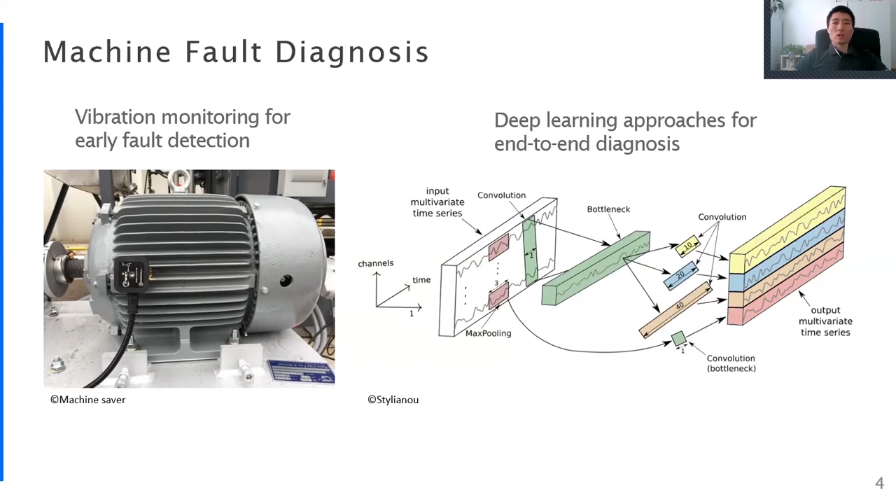However, when we are going to deploy the deep learning models for railway freight wagons, we got many challenges in practice. Here, we will show you two examples. Normally, we install the sensors on the bogie for vibration monitoring. Bogie is the running gear and the most important part of the wagon. In practice, it is extremely difficult to collect faulty data due to the cost, operational issues, and the safety issues. We can only do the experiments on one or several wagons.

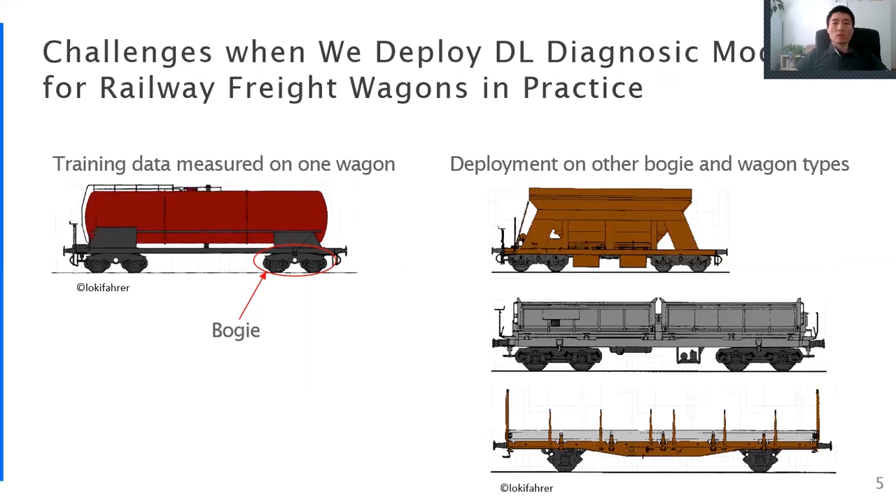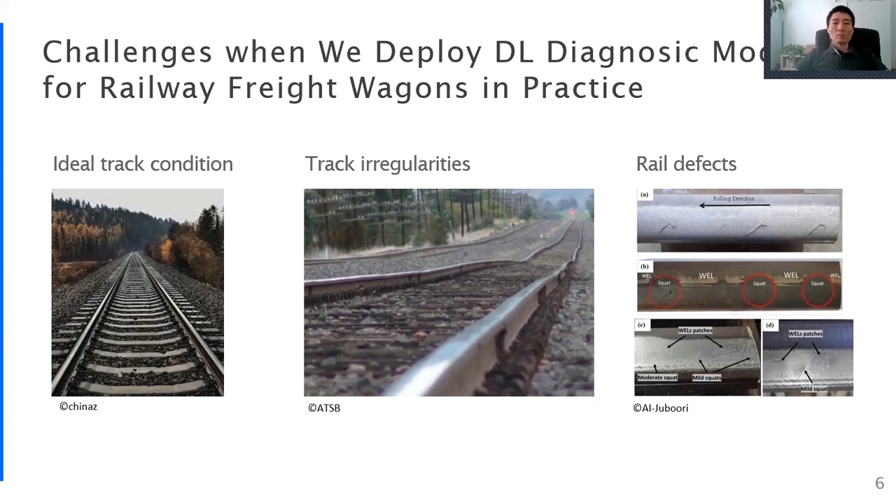Once the models are trained on the training data, we have to deploy the models on many different wagons and bogies, which could have different dynamic characteristics. That means it results in differences between training and testing data distributions. Furthermore, the wagon is running on the track. The track condition can also be very different. The track can be in a good condition. There could also be severe track irregularities or rail defects, which can be regarded as signal interferences, causing abnormal vibration excitation on the wagons.

In summary, the conditional variations in practice can result in the difference between training and test data distributions. We expect the diagnostic model can be robust to have a similar performance when tested within and outside the training data distribution. That's the reason why we conduct this empirical study. We want to answer the question: is the deep learning diagnostic model robust to conditional variations? The idea of the empirical study is to test several state-of-the-art approaches for machine fault diagnosis on conditional variations which can happen in railway normal operations.

As baseline models, we select the residual convolutional neural network as a backbone. The ResNet consists of 3 residual blocks for feature extraction. After global average pooling, there's a fully connected layer for classification. In the first model, the input data is the raw vibration data. We also consider if signal processing techniques can affect the robustness of the models. Therefore, we use a short-time Fourier transform to get the frequency spectrum as an input for ResNet. We also use a wavelet packet transform to get different scales of wavelet coefficients as the input for ResNet.

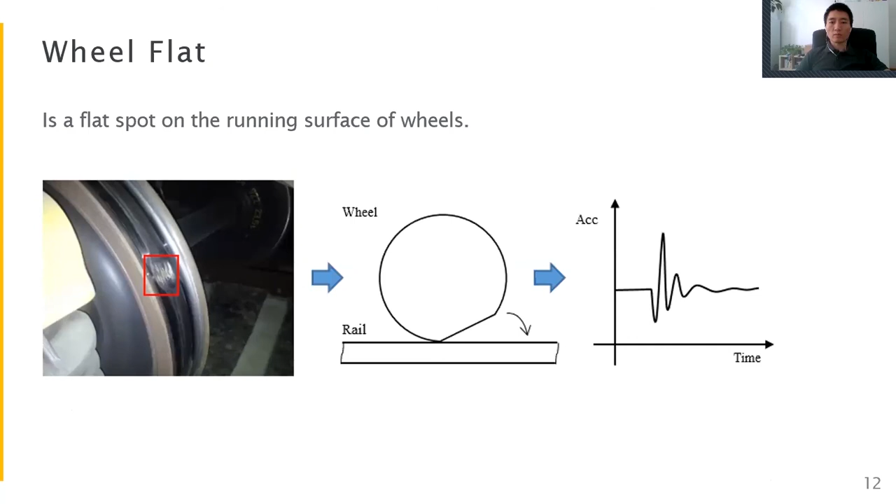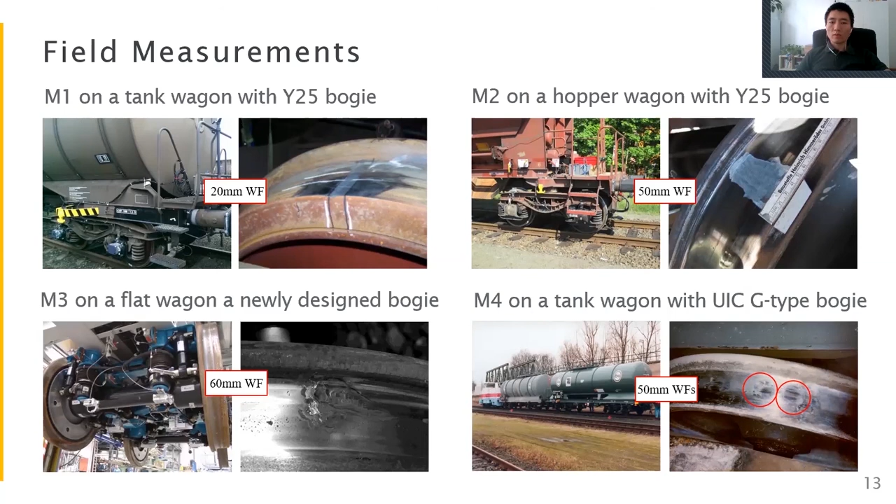We spent a lot of effort on data collection. In this study, we mainly use the following 4 datasets. M1 is measured on a tank wagon with a standard Y25 bogie. We manually created a synthetic wheel flat with a 20 mm length. In the M2 dataset, we also created a synthetic wheel flat with a length of 50 mm on a hopper wagon with a standard bogie. In M3, the measurement was conducted on a newly designed bogie with a natural wheel flat with a length of 60 mm. In the M4 dataset, the measurement was done on a very old tank wagon with a UIC bogie. There were 2 adjacent wheel flats with a length of 50 mm.

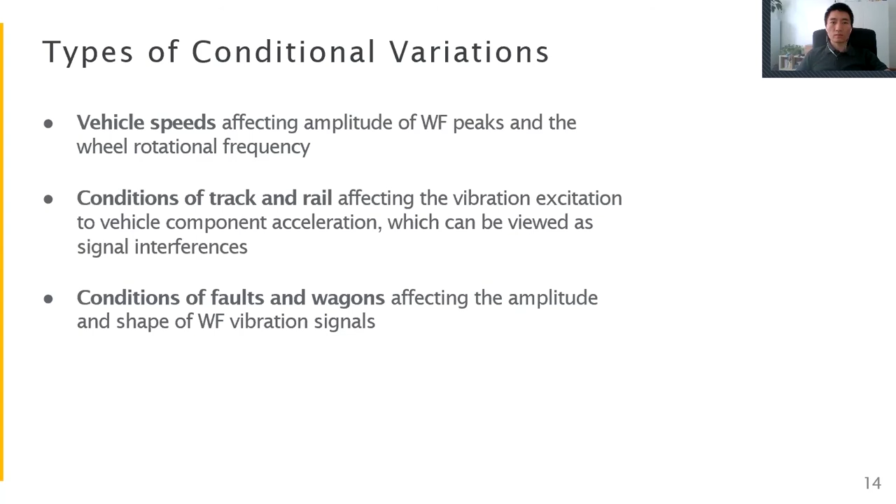We defined 3 types of conditional variations. The variation of vehicle speeds affects the amplitude of the wheel flat peaks and the rotational frequency. The variation of track and rail conditions can be regarded as signal interferences, as previously presented. The variation of fault and wagon conditions affects the amplitude and the shape of the wheel flat signals. For each conditional variation, we conduct an experiment.

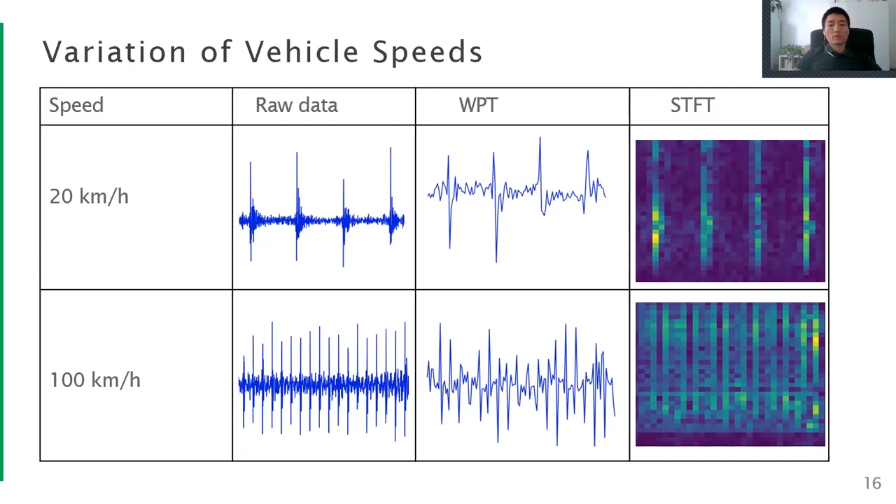In the first experiment, we show 2 examples of wheel flat signals at a low and high speed respectively. No matter whether it is raw data in the time domain, wavelet coefficients or the frequency spectrum, the wheel flat characteristics are always visible. We train all models on the data at higher speed ranges between 55 and 95 km per hour. When we test the models on data in the same speed range, all the models achieved satisfactory detection accuracy.

However, the detection accuracy decreases with the decrease of speeds. That means when the difference between test data distributions and training data distributions increases, the model performance decreases significantly. In comparison to 3 ResNet-based models, the GBDT with handcrafted features has achieved much better robustness.

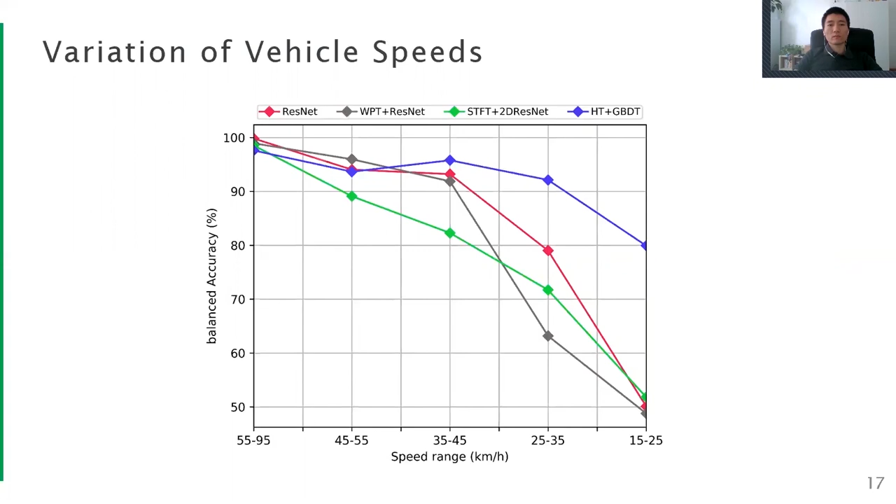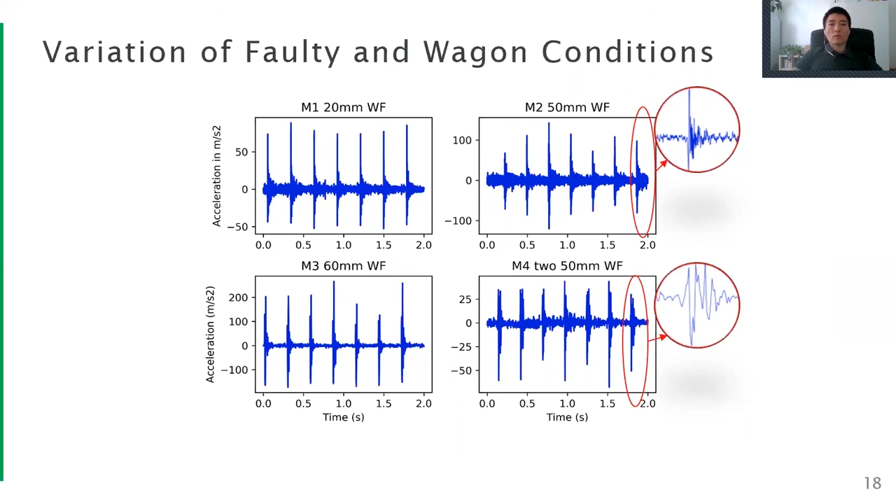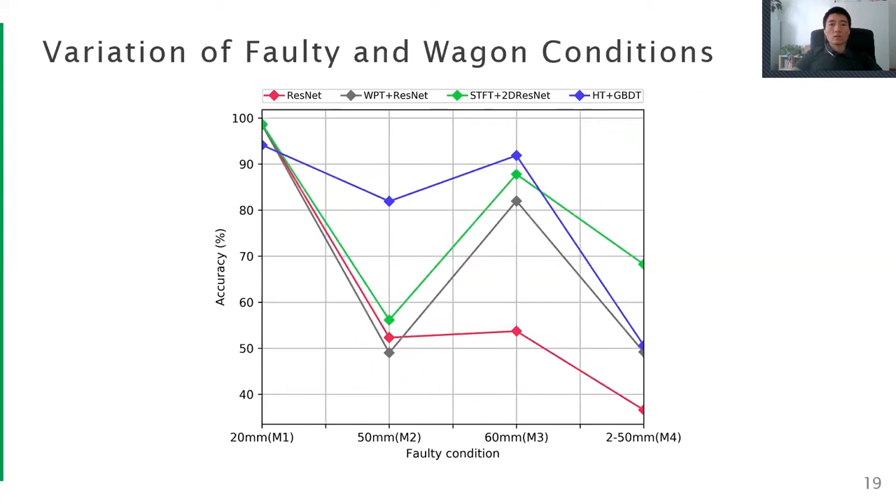However, when we train the models on the M1 dataset and test on other datasets, none of the models can achieve satisfactory performance on all datasets. GBDT with handcrafted features works on M2 and M3, but fails on M4. The 3 ResNet-based models failed on both M2 and M4.

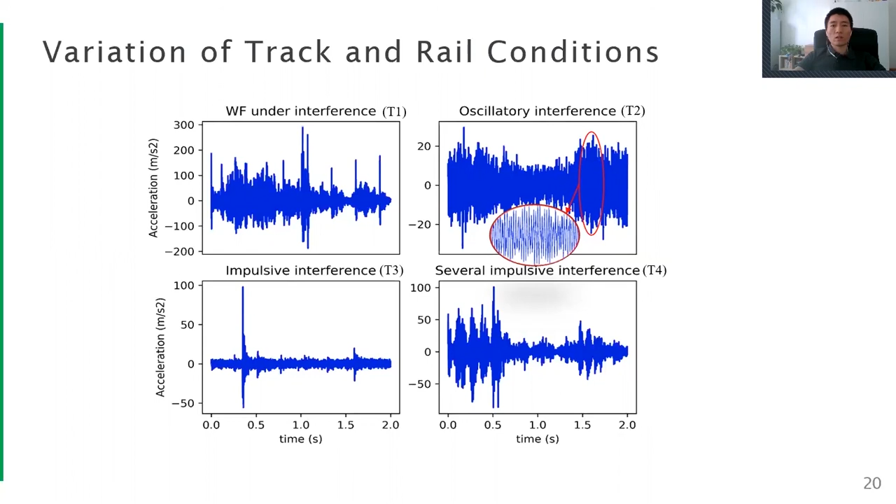In the third experiment, we plot the typical signal interferences caused by variation of track and rail conditions. In the top left diagram, T1 is the wheel flat signal under interferences, which can be caused by severe track irregularity. T2 is normal data with interferences caused by track irregularity. T3 is impulsive interferences, which can be caused by rail defects. T4 is several impulsive interferences, which look similar to a wheel flat signal.

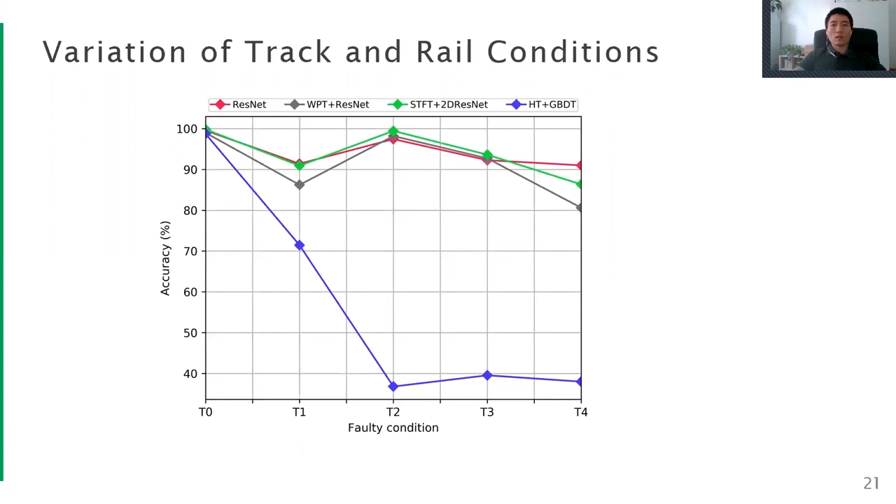We trained all models on the T0 subset. T0 is a clean subset manually selected from the M1 dataset without any signal interferences. All the models achieved satisfactory accuracy above 99% on T0. Surprisingly, in this case, all three ResNet models have much better robustness than GBDT with handcrafted features.

In the previous experiment results, we have learned the CNN models are less robust than models with handcrafted features under conditional variations. However, the CNN models are more robust under signal interferences. Pre-processing using signal processing techniques cannot improve the robustness.